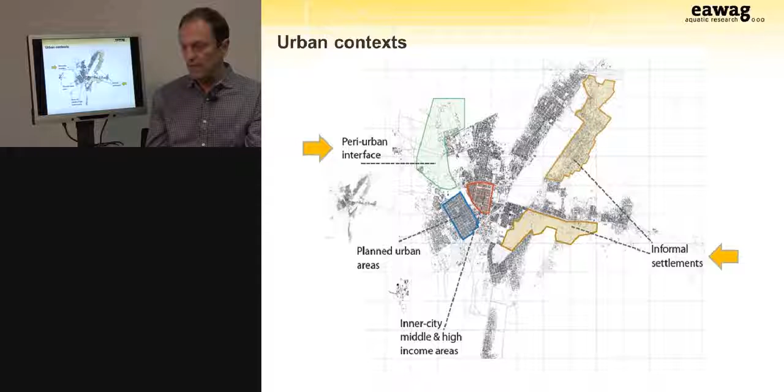These two areas that I've mentioned are experiencing rapid urbanization and in-migration from rural areas. They are characterized by poor service provision and also rapidly shifting environments and dysfunctional informal service provision. It is therefore no wonder that these urban areas show a poor improvement in achieving the MDGs in the last 15 years.

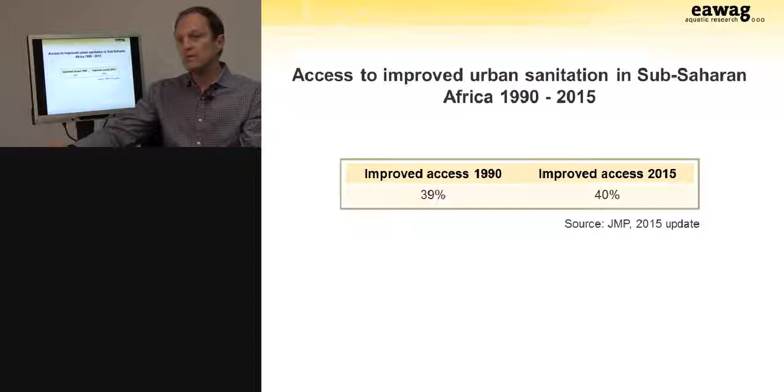These two numbers here: improved access to sanitation in urban sub-Saharan Africa in 1990, 39%, to the figure from this year, 2015, 40%, shows that we've only made progress by 1% in sanitation in urban areas. And of course, the reason for that are the complexities in dealing with service provision for these notoriously difficult and complex areas. One of the reasons for the complexity is the diversity of needs and priorities of the actors involved.

And urban sanitation is transaction intensive, which means there's a number of different actors, stakeholders involved, which need to be on board for proper planning of services for the urban population. The authorities, the municipal authorities, national authorities, religious leaders, utilities, the police for enforcement purposes, but also the central service providers, the public, private, manual, informal, formal service providers that provide some of the services around fecal sludge management.

The tenants and landlords who actually pay for these services, for the emptying of their septic tanks or latrines. The different donors, NGOs, actors who finance some of these schemes and projects, and last but not least, the end users, the farmers, the fuel consumers, the breeders who could use some of the outputs and nutrients coming out of proper end uses.

On this slide, we see what an ideal fecal sludge management governance could look like. At the center, the municipality or the local authority, ideally an elected body that takes the decisions on behalf of its constituency. And on the bottom, the three main actors involved in service delivery: the community-based organizations, the NGOs, also called .org, the utility in charge of treatment mostly, sometimes collection, .gov, and lastly, the private entrepreneurs who also play an important role in providing affordable services for the poor.

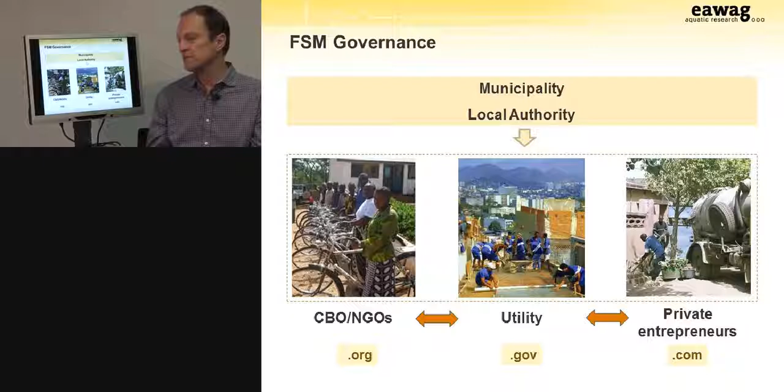But how do we actually plan for these complex contexts? I'd like to introduce you to two recent innovations in integrated sanitation planning. First one is Sanitation 21, recently published by IWA, EAWAG and GIZ, and it provides a citywide planning approach to environmental sanitation services and fecal sludge management. It takes an incremental approach. That means it goes for a step-by-step rather than a big bang, one-size-fits-all approach. It's a sound approach, but unfortunately has never been implemented on the ground, because it's a very new document.

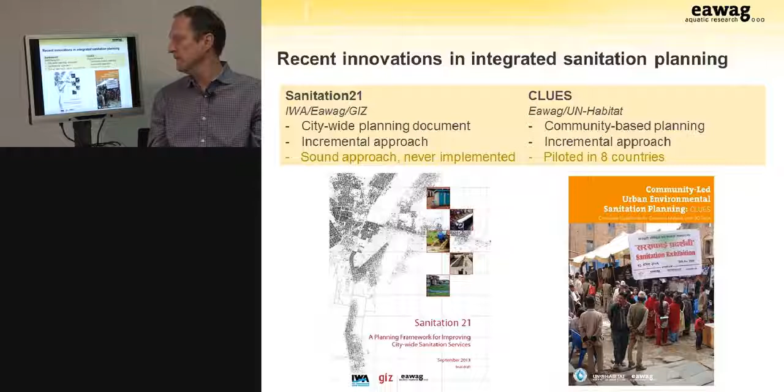The second approach is the CLUES approach, which stands for Community-Led Urban Environmental Sanitation Planning. This was produced by EAWAG and UN Habitat, published in 2011. It provides a bottom-up, people-centered approach to better environmental services, and is also incremental in nature, which means it allows for realistic and affordable solutions for neighborhoods in cities. CLUES has been piloted in a number of countries, and we look back at a number of successful approaches and piloting in Sub-Saharan Africa and Asia. I'm going to now run you through some of the details of both approaches.

The Sanitation 21 approach is a citywide approach, like I've said, and it starts out with defining the institutional framework for service delivery, identifying the main stakeholders, assessing the priorities of these stakeholders, and trying to define a collective vision and priorities for improved sanitation in the city.

Importantly, in step 1, you establish a city sanitation task force and agree upon the planning process itself. In step 2, we look at the existing context and provide baseline information by reviewing existing information. We also assess the capacity of existing systems and identify areas of high risk. Lastly, we try to identify constraints to service provision.

In step 3, we start looking at strategies for improved sanitation systems at citywide level. Important here is the adoption of an incremental approach towards service delivery, comparing decentralized versus centralized systems, considering a range of different technology choices, and planning for end-use disposal or reuse, if practical. Important is also to look at the cost implications to stay as realistic as possible.

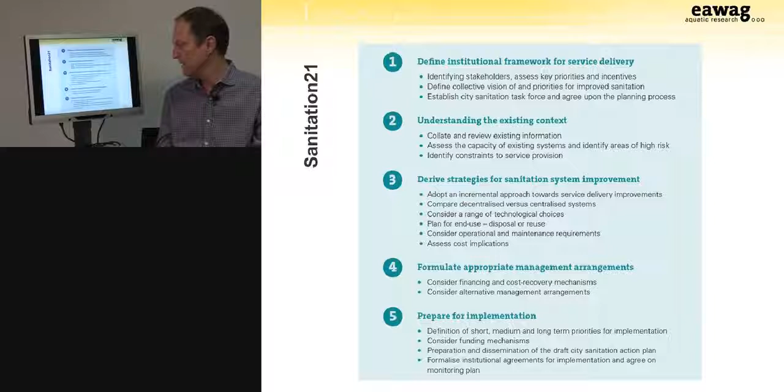In step 4, we're formulating appropriate management arrangements, considering financial and cost recovery mechanisms, and considering alternative management arrangements. And lastly, in step 5, preparing for implementation, this is where we actually define the City Sanitation Action Plan. We define short, medium, and long-term priorities for implementation.

Moving from citywide to neighborhood scale, I mentioned CLUES was especially adapted to neighborhood planning processes, and CLUES follows pretty much the same steps and sequences as in Sanitation 21. In this case, we start with process ignition, so creating demand at the neighborhood level, followed by a launch of the planning process. This is usually done in a collective workshop at neighborhood level, followed up by a detailed assessment, creating the baseline of information and reporting on the current situation in the neighborhood.

In step 4, it's about prioritization of needs. What does the community actually perceive as their biggest problem? And then validating these needs and problems. In step 5, we're identifying different service options, also looking at what kind of technology and systems are feasible for the given context and neighborhood, and looking at the different costing options of these different service options.

Step 6, development of an action plan. This is where external experts, local experts come in and actually help out in devising an action plan that is costed, timed, and ideally implementable step by step. And lastly, step 7, implementation of the action plan. This is where we go for an incremental implementation of the action plan outlined in CLUES.

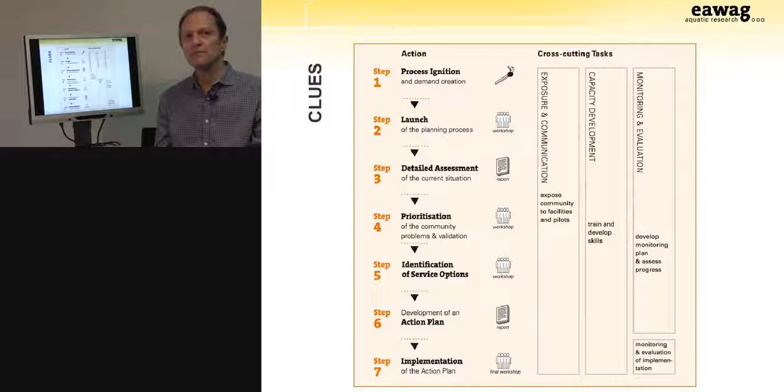And both of these planning frameworks, of course, also are very applicable to fecal sludge management schemes. This slide depicts the sanitation chain from user interface on the left here to the end user, in this case industry, throughout the entire sanitation chain. We have the household toilet, the emptying, the transport, the treatment, and finally end-use application, with the different stakeholders involved across the sanitation chain. The households who usually pay an emptying fee to the private enterprise that comes and picks up and empties the pit latrines or septic tanks.

The private enterprise that pays a discharge fee to the public utility that treats the raw sludge. And finally, the end use, in this case industry, for example cement industry, paying a purchase price for the treated and hygienized dried sludge.

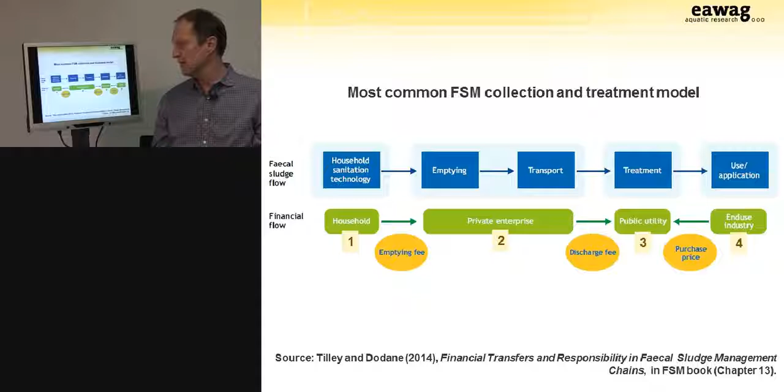So the take-home message from this session would be to plan for an integrated approach to fecal sludge management across the entire sanitation chain, not only single parts or single technology solutions, but to actually go for appropriate and realistic planning frameworks that allow for sustainable and fundable, implementable solutions for complex urban areas.